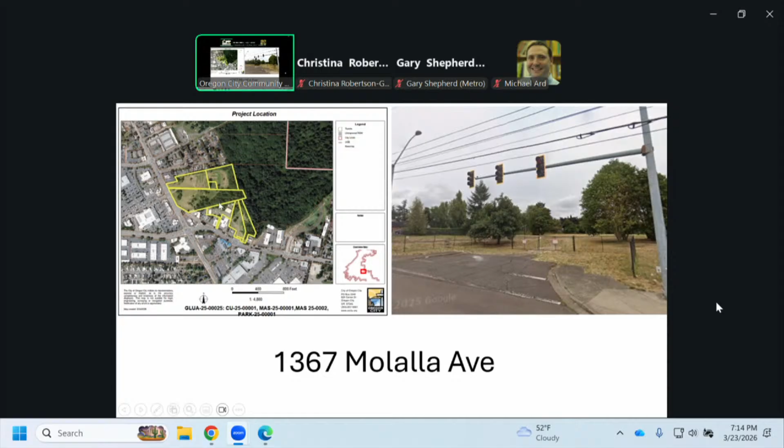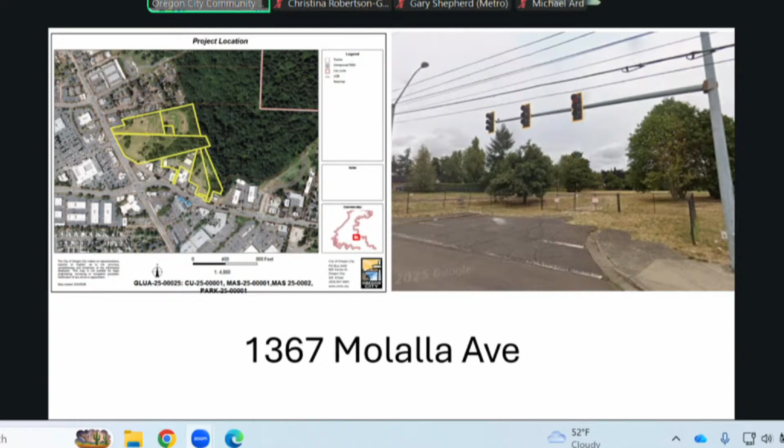So the property is located at 1367 Molalla Avenue. You'll see to the left the parcels involved in this master plan application. The main parcels are up here. The three smaller parcels you see down below are required to connect the public road to Beavercreek Road, and will be removed from the master plan once the detailed development plan is completed.

Here is a zoning map showing the myriad of zoning around this parcel. The parcel is on mixed-use corridor 2, which, a lot like mixed-use corridor 1, allows varied uses of mixed-use and also standalone office, standalone retail, and standalone multifamily. What's different in mixed-use corridor 2 from mixed-use corridor 1 is there's a minimum FAR, or floor area ratio, and the applicant has submitted findings showing they're well above the minimum FAR for this zone.

In red, you'll see general commercial. That's where the Safeway development is. And as you move farther south, kind of where the Fred Meyer development is, that's our general commercial zone. Drive-throughs are permitted uses there - that's kind of your general hilltop commercial, more suburban-oriented development.

Campus industrial, just farther south, is related more towards the Clackamas County campus and our associated campus industrial uses that are more employment-based. To the north, you'll see R3.5 and R10. Those are our residential zones. And at the very top of this map, you'll see the Newell Creek Canyon parking lot.

It's just a little bit outside of this map, but as part of the presentation there'll be some conversation about the shared use path, and the goal is to connect one day to the parking lot of Metro's Newell Creek Canyon access. That's just outside of this map, right north of Beaver Lane and Otter Lane.

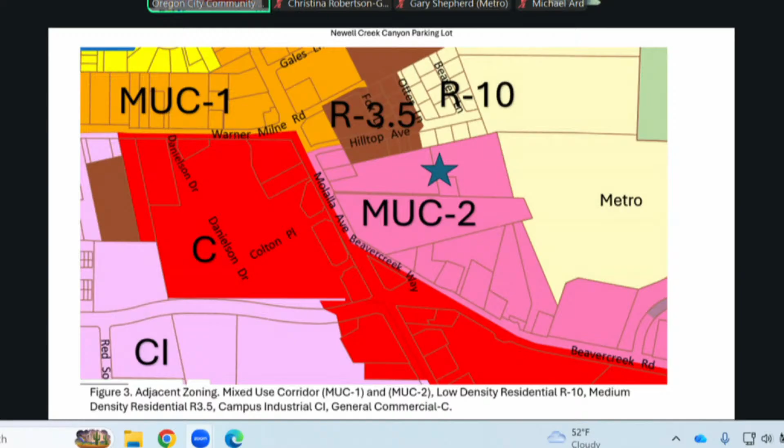So the summary of the master plan elements, the general development plan, are on the slide, and I want to go through them while you look at the map. You don't have to read all of my notes, but you can look at the map while I talk. The applicant didn't have to come in for a master plan - this could have been done through site plan and design review as a multi-parcel redevelopment. But the applicant came in for a number of reasons.

One, they wanted a 20-year master plan to allow clarity and certainty in our development code. When you apply for a master plan, you're allowed to utilize the code that's in place at the time you apply over the many implementation phases of a development. So as Parcels A, B, and D are developed, they all share the same development code as when the applicant submitted.

That allows flexibility in the master plan process. They're able to look at a full transportation analysis for the whole site build-out to see if there are any off-site impacts, rather than coming in individually. We wanted a wholesale approach - this allowed us to look at the reasonable worst-case scenario and what any off-site impacts would occur.

Implementation would happen at the detailed development plan, but this master plan allows us to do that. We can look at the public road and utility locations and site grading as a general approach to see if it meets the intent of our code, and then it can be implemented through each detailed development plan.

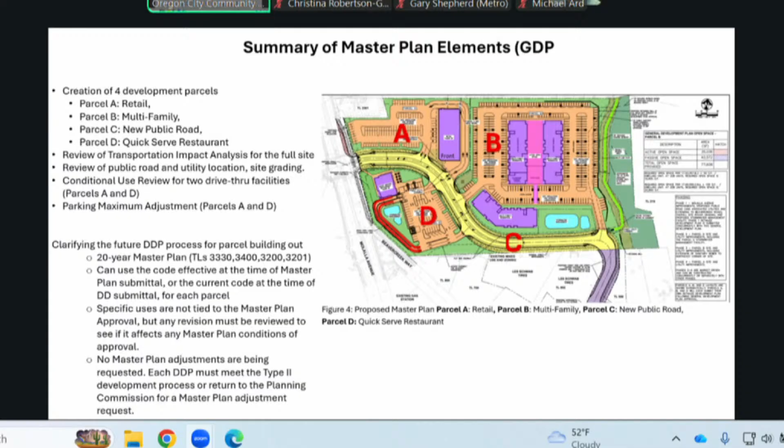Let's go to the next thing. As I mentioned, the two requests in front of the Planning Commission this evening that are type 3 reviews and have a clear nexus are the conditional use for the drive-throughs and the parking maximum. The two questions I'd pose to the Commission are: has the applicant adequately demonstrated a need for an adjustment to the parking maximum standards on parcels A and D, and have any adverse effects been mitigated? And has the applicant designed drive-through facilities on parcel A and D that are safe, contain adequate queue storage, and have any adverse effects mitigated?

I'll go through and lay out both parcel A and D's requests. But when you're thinking about the conditions in the master plan and any questions you may have for the applicant or staff, that's the lens you should be looking at in regards to the parking maximum and conditional use.

So the parking adjustment for Parcel A—what you see here, the applicant initially was working with staff on a specialty grocer on Parcel A. At that time, staff really understood that a specialty grocer probably had a direct reason to need a parking maximum. Because of the odd layout of that Parcel A and where the road comes in, there was a constrained area. What you see to the left is a no-build easement. You can build a parking lot there, but you cannot build any buildings. So having the building right up against Molalla Avenue was tricky.

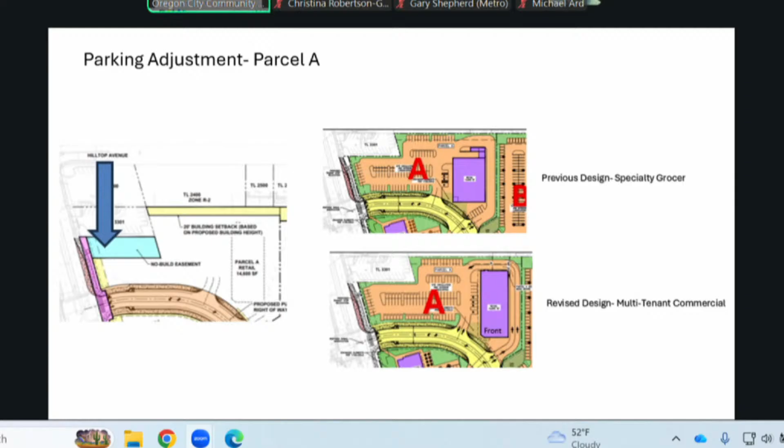About January of this year, the proposed specialty grocer came back to the applicant, and that agreement didn't move forward. So the applicant worked with staff on redesigning that building on Parcel A to be more of a spec multi-tenant building. The building would stay in the same general location, would front the new public road, and what was the back of house—loading and unloading—was repurposed to queue storage for a drive-through. At the north of the property, at the edge of the building, would be where the drive-through would be, with queue storage along the side and the drive-through in the rear.

So with this analysis, the parking maximum request—staff saw it as not necessarily tied to a use. There is no use tied to this building; it could be many different options, it's really spec at this time. But I really understood the constraints of that no-build area. Pushing a spec building against Molalla Avenue, being long and skinny, did not make developable sense and would be awkward for both pedestrians and people parking trying to get access to the building. So in this sense, I really see it as a mitigation for the constrained site.

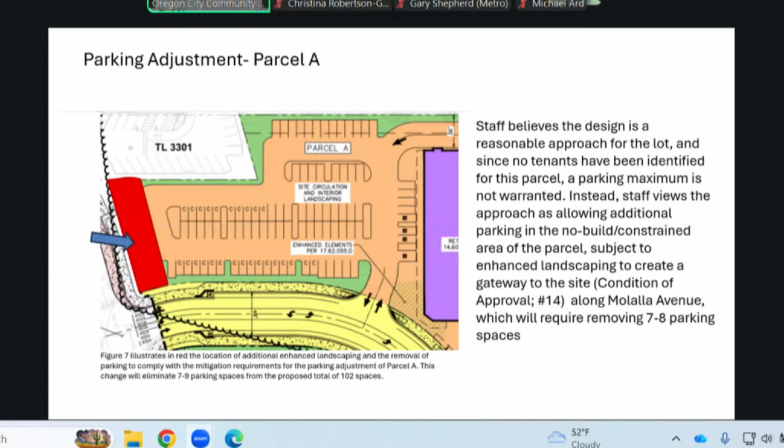Staff used the approach of allowing additional parking in a no-build constrained area of the parcel, subject to enhanced landscaping to create a gateway to the site—that's condition of approval 14 in the staff report. Rather than a use analysis of whether they've made their case, I'm really looking at it as a site planning, space analysis: if a building can't go at Molalla Avenue, what would you rather have—additional parking to support whatever's there, but also make sure there's a gateway of enhanced landscaping. If the Planning Commission denied the applicant's maximum parking adjustment, there would just be a very large landscaping area most likely, and I don't know if that necessarily would serve the people visiting the site or would be beyond what would be required as the gateway. So I'm available for any questions, but that's what staff has seen for Parcel A—more of a site planning analysis rather than a parking analysis.

The parking adjustment on Parcel D is a quick service restaurant.

As part of the analysis, both through the drive-through and the parking adjustment, really seen as a gateway look on Molalla Avenue. So the applicant initially showed some enhanced landscaping areas, right along the intersection, along the new public road of Molalla Avenue. But really, I think as part of the conditional use, making sure that that car and queue storage is blocked from the pedestrian experience on Molalla Avenue.

Staff has added some additional areas in red that will be added to that enhanced landscaping area. And those conditions look at square footage of enhanced area, and there's a certain amount of additional trees and shrubs that will be required, both in Parcel A and Parcel D.

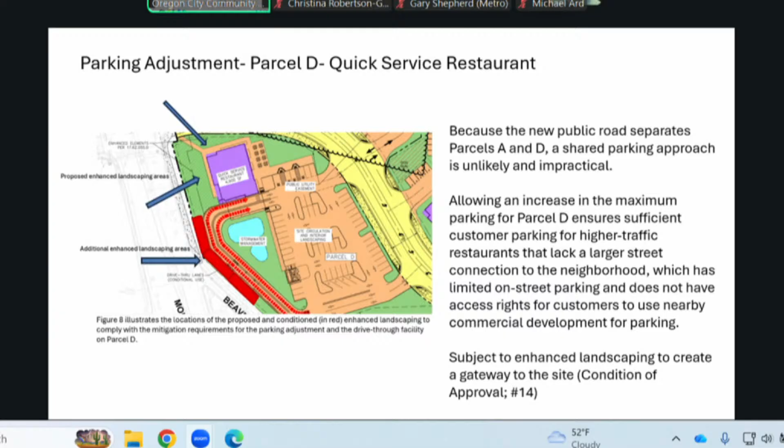So the conditional use drive-through facility for Parcel A, as I mentioned, is nicely repurposed to have a double queue storage. These are both permitted uses, whatever the drive-through will be, for a restaurant or other type of use that requires a drive-through permitted in the zone. The drive-throughs are located to the side and rear, and the buildings are not exclusively dedicated to drive-through. Drive-throughs are an ancillary use.

This is not a small little drive-through coffee facility. This is a larger building that has drive-throughs as ancillary.

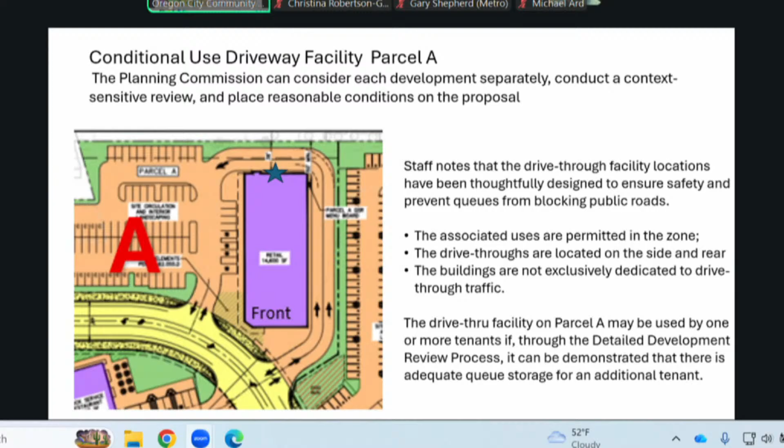The Planning Commission can consider each development separately, conduct a context-sensitive review, and place reasonable conditions on their proposal. If the Planning Commission was reviewing a drive-through down on our main street or in our downtown area, that's a much different context, with a different analysis of impact and mitigation. So when thinking about the conditional use review for these two facilities, the key thing is understanding the context of where you are in the Hilltop area, what its impact would be for both pedestrians and vehicles inside this Hilltop area, and you can put reasonable conditions on this application.

So the conditional use driveway facility for Parcel D, as I mentioned, is well-designed. It has a large queue storage, and staff has identified additional enhanced landscaping.

The one thing I do want to add is that we put a condition on, anytime you have a popular quick serve restaurant, the first couple months of opening days sometimes can be more popular than what a standard transportation analysis impact would predict. So as part of the DDP application, staff is requesting the applicant implement an on-site and off-site opening day pedestrian and vehicular circulation and safety plan to address some of that additional traffic congestion that might happen during the opening days of any restaurant.

That would be scoped out with our transportation engineer about how to do flaggers, what's the opening day approach if there's any kind of additional transportation impacts while the restaurant is popular, before it goes back into background conditions.

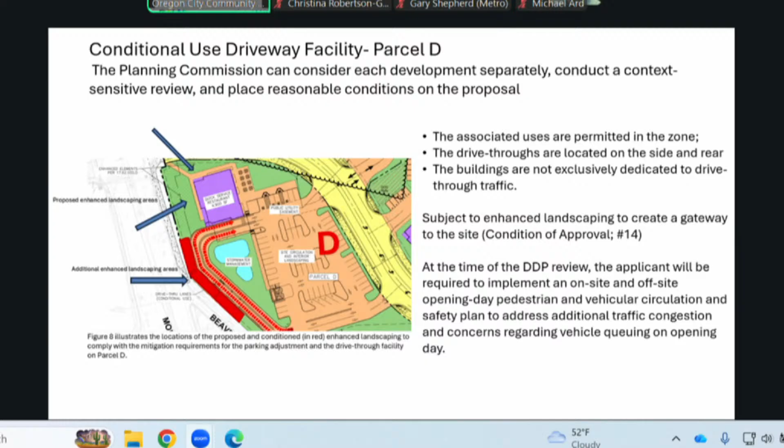As part of the master plan, we look at a utility analysis. We did a transportation analysis with the applicant to see what offsite impacts may occur, and both the application submittal and our review by our transportation engineer identified that there were no additional offsite impacts beyond the two signals at Beaver Creek and Molalla Avenue that they would add to their leg of the intersection. Each detailed development plan will be paying for the systems development fee at the time of DDP application, as well as that proportional share for their contribution to the project at 213 and Beaver Creek.

The shared use path, as you see on your right, is a bicycle and ped path that's been identified in our transportation system plan. At a transportation system plan level, we're really just connecting points A and B. So oftentimes you'll have a line on the map, but when you get to the detailed development plan or a normal site plan design review, you look at the actual path of where you get from A to B.

So the goal is to have a connection for pedestrians and bikes from Beaver Creek along the site, through the site, and connecting up to that parking lot at Newell Creek Canyon. How do we get there over time and ensure our development applications can provide for that long-term build-out? The exact location can be amended on the site where it makes the most sense for the development, safety, grade, and all those kinds of things.

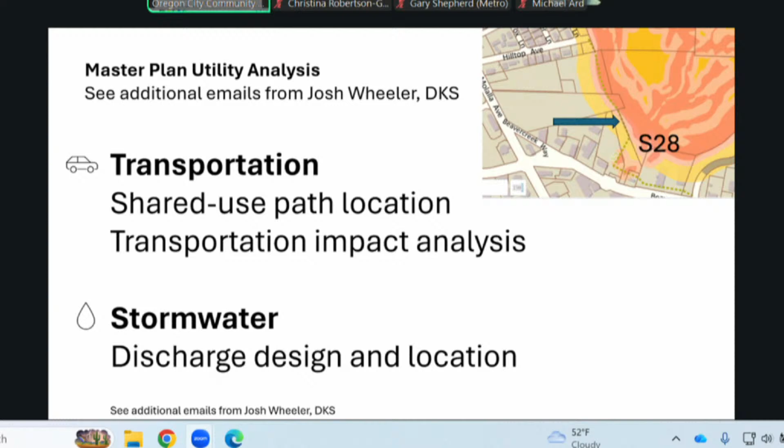As I mentioned, the detailed development plan was for Parcel C, the public road. That public road runs along the master plan site and also down along those additional parcels I spoke to you about. These parcels are required to be in this application because of an agreement with those property owners that this road gets built, but they are not part of the master plan moving forward. So it's brought in to be reviewed, and once the street is completed, those tax lots will be taken out of the master plan.

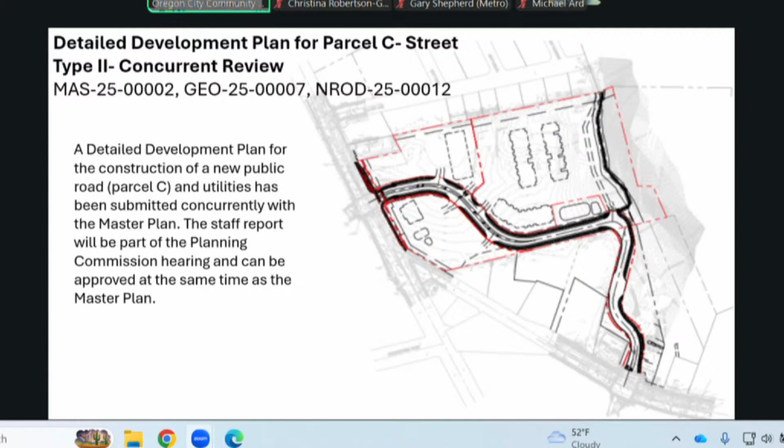There are two items I want to review as part of the detailed development plan for the streets. There's a small section in our natural resource overlay district. There is a stream that's culverted, and the culvert opens right toward where the road connects to Beaver Creek, the new public road. You can see it down here on the figure. As the road comes in, it will not cover any of the existing open resource, but where it's culverted in the 50-foot buffer, the road will nick a little bit of that buffer, and the applicant is required to mitigate for that per our natural resource overlay district.

They have identified a mitigation area, which is actually in the same location as the shared use path. Our natural resource overlay district code allows you to mitigate at the exact location if available, but in this case it's not possible because the land goes down a hill and there's no location to mitigate right at the resource. You can mitigate farther on site or within the same basin, so there are a couple of opportunities, and that's written in the condition. They could work with Metro or other parts of the Newell Creek Canyon area on their mitigation. Our mitigation standard in the natural resource overlay district is clear and objective: you have X feet of impact, Y square feet of mitigation, even the trees and bushes are a math calculation. In the conditions of approval for the street, you'll see they've done that math calculation per our development code, provided the findings, and included a landscaping plan that meets our code in their submittal application packet.

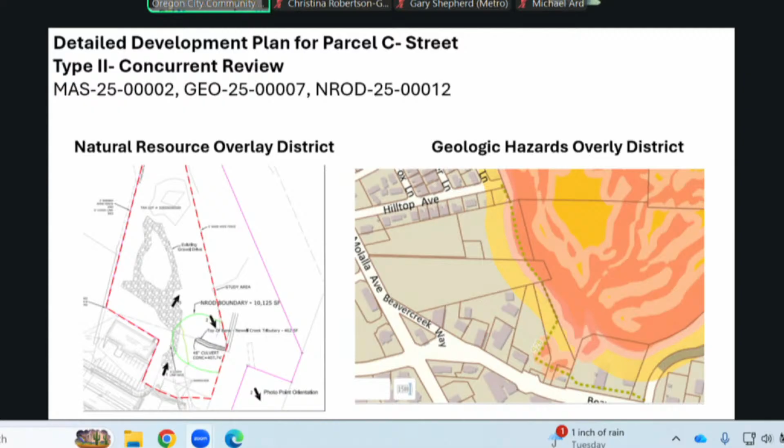So there's not really access to the Newell Creek Canyon area of Metro in this location. To access this, you would have to make your way up to the parking lot to get access to the Metro site. There's really not topographic-wise a way for kind of a side trail to get down to the Newell Creek space.

So staff has identified some revised conditions of approval. One relates to the master plan that really looks at the shared use path's safety in its location. While it can be technically built through a geologic hazards code, we as staff are recommending a revised condition of approval that requires the applicant to relocate that shared use path higher up and integrate it with the Parcel B redevelopment with the apartments, so it's integrated with the development. Eyes are kind of on who uses the path, and it can be seen.

So I have those conditions. I won't read them, but I have those conditions on this screen.

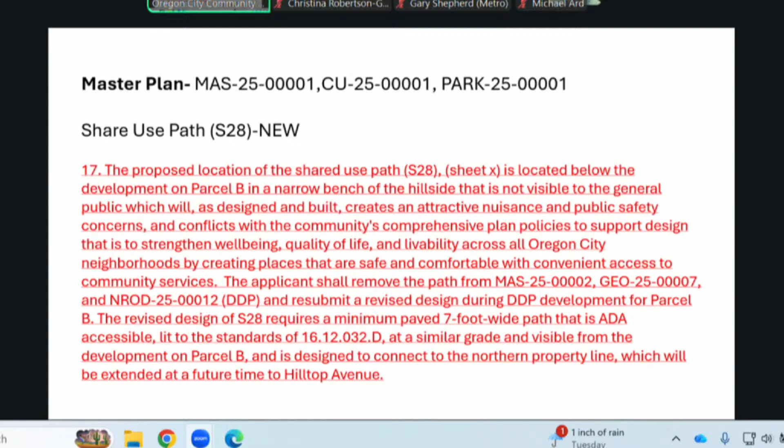With that, the detailed development plan would be revised to remove the conditions related to the path on the detailed development plan's approval, with one condition remaining that says the applicant shall construct their portion of the TSP project within Parcel C as a public 7 to 10 foot path. So the road portion, as you come up from Beaver Creek Road, will have a sidewalk that is the shared use path. It's only when it leaves the right-of-way that they'll have to come back with on Parcel B, the apartment section.

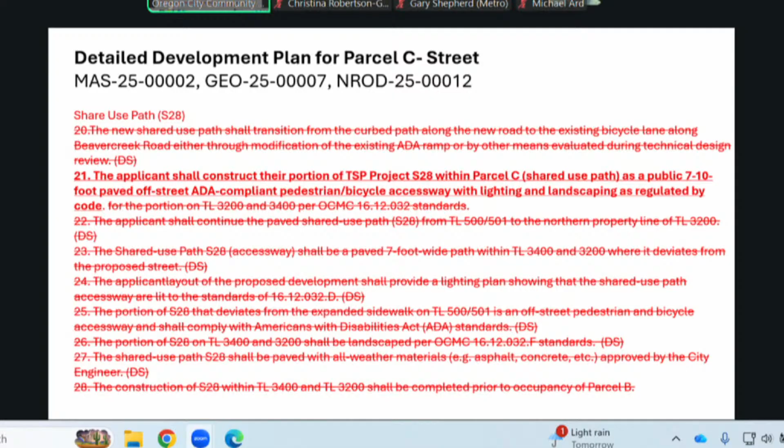One final revision I just want to highlight. I was speaking to the applicant about Parcel D, the quick serve restaurant. And they brought it up and I didn't realize it, I'm glad they did. There are some power lines right at Molalla Avenue, and the condition as written, some of those trees may conflict with power line requirements.

So we added an extra sentence that said it's not changing the number of trees, but if those trees are planted near power line easements, then the final height can go down to the height that you could put under, like a street tree height under a power line. So we had, I think it was either 35 or 45 feet final height. In those areas, it would probably be like 25 feet, which is allowed under power line easement. So it's just an extra technical sentence acknowledging that in that gateway area, there may not be ways to put some full trees where there are power lines.

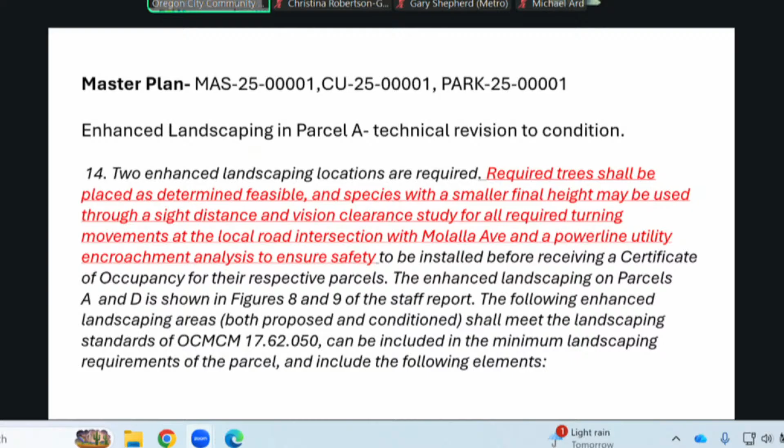Staff recommends approval of both applications with the revised conditions outlined in the presentation. You have many options this evening. I think the applicant will be requesting continuance, so we don't have to go through these tonight. But I'm available for staff questions, and Josh Wheeler is available for any engineering questions you may have related to stormwater, the shared use path, and transportation.

Are there any questions that the commissioners have of staff regarding her presentation? Commissioner LaSalle?

I was reading the staff report for the master plan, and on page 25 it says the application was deemed complete on December 18th, 2025. That's correct, and the 120-day decision date for this application is April 17th, 2026, with an extension to May 17th.

Why are we just seeing this now? It seems to be putting everything on a pretty short timeline. The applicant turned in the application in June and it was incomplete, and they worked through the summer and fall to complete it. Right around January, as I mentioned, their tenant in Parcel A fell through, so they extended 30 more days with staff, went back and reworked Parcel A's design, and now we are here with the hearing.

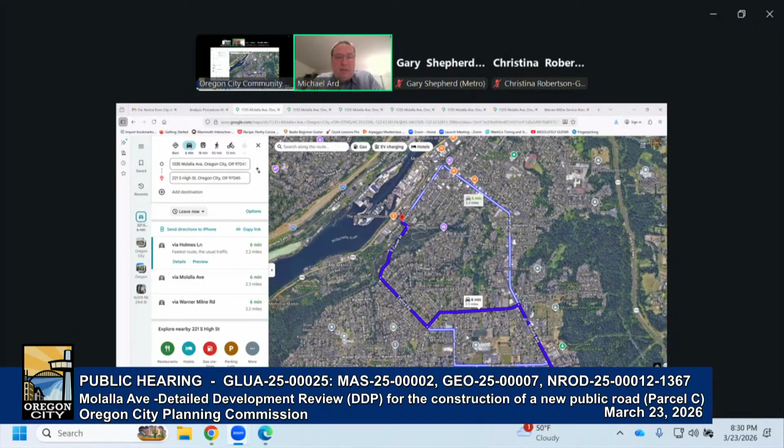I wanted to share a few things regarding my review of the traffic impact study, and the reason that I had some concerns. Real quickly, can you state your name for the record? Oh yes, sorry, Mike Ard. I am a professional transportation engineer with Ard Engineering, and I reviewed the application.

I was interested in seeing what the application had to say about the intersection of Warner Milne Road at Linn Avenue in particular, because I know it's in close proximity and that's an intersection that's been subject to some significant discussion historically within the city. And I was surprised to see only 15 PM peak hour trips, or about just a little under 8% of the site trips, shown headed that direction.

The traffic impact study indicated that 5% of the residential trips would be shared between Warner Milne Road and the street—the name's not showing up, but it's this blue one that's highlighted here. Holmes, I think it is, something like that. And then 10% each of the commercial trips on each of those roads.

And what I wanted to show is why I find that likely to be incorrect. So if trips are headed to locations that are on Telford Road or going down the hill via Center Street, it's about the same travel time and distance to take Warner Milne Road versus the alternative to the north. And so that's kind of a dividing line where things to the north side of Telford Road generally would not attract significant trips from Warner Milne, and things to the south would.

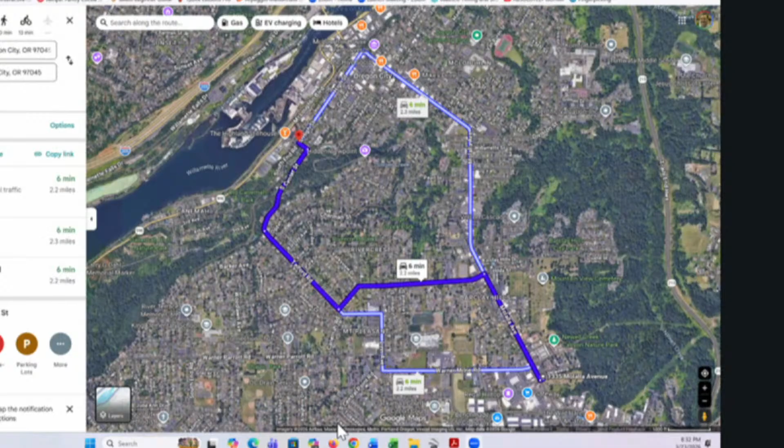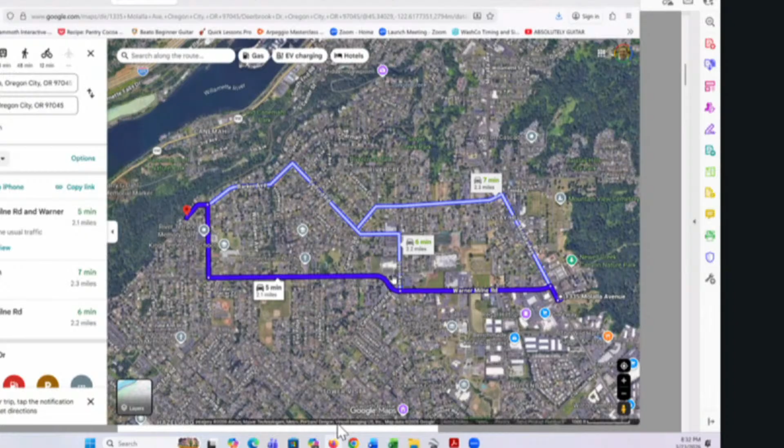Boy, I kind of blocked off my tabs here, so I need to just resize this real quick so that you can see. Looking at other destinations though, you can see anything that's on Warner Parrott Road, anything that's on South End Road before you go down the hill, is most conveniently accessed via Warner Milne Road. Anything that's on South End Road to the south is also best routed via Warner Milne and through that intersection. If you're going out Central Point Road, same thing.

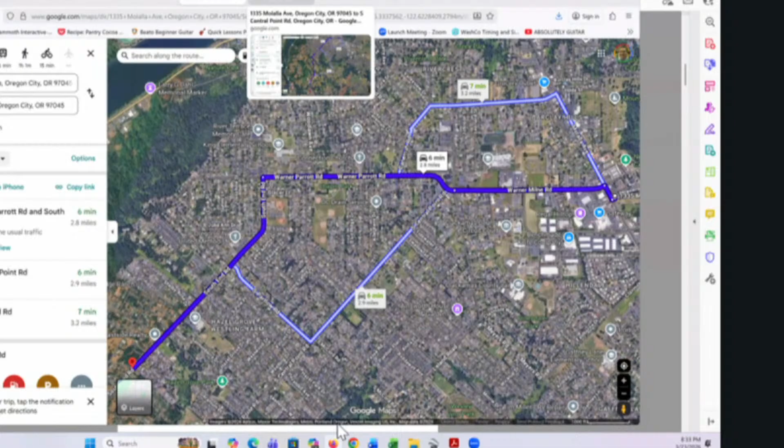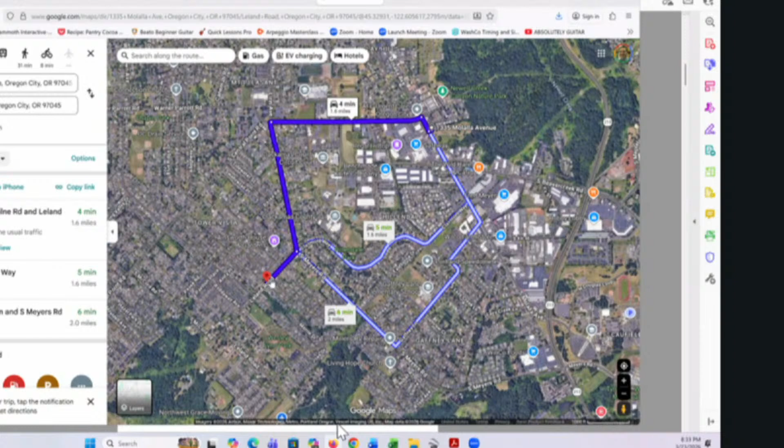You go down Warner Milne to Central Point Road. If you're going to Leland Road, the fastest route to get there is again Warner Milne Road. So there's a significant amount of traffic in the city that's going there. If you're headed to Canby, like 5% of the residential trips appear to be showing going to Canby, again the fastest route is via South End Road, which again would take Warner Milne Road.

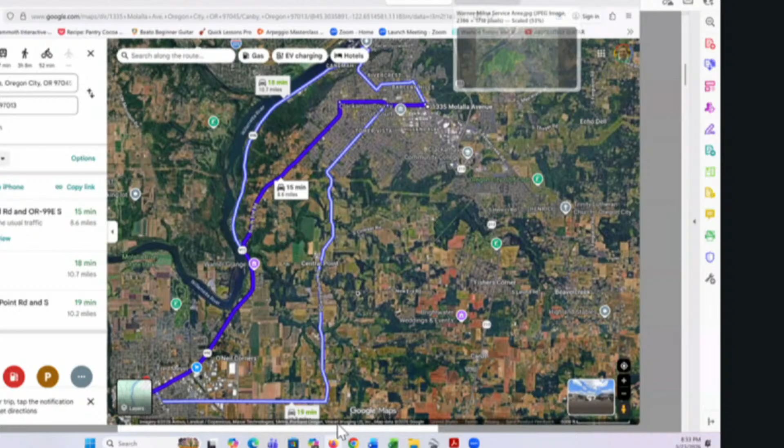Based on all that information, I drew a little area and put this into my comments via email that shows the basin within the city of Oregon City that is served by Warner Milne Road with respect to this project site. So this was all for trips that have an origin at the site, and it's a very significant portion of the city. Even if we assume that all of the distribution assumptions the applicant made in their traffic study were correct...

but then corrected the routing to reflect the fastest and shortest travel paths, it would be a very significant change to the trip distribution model, and there would certainly be more than 20 trips that pass through that intersection of Linn, Leland, and Warner Milne Road. So I do feel like the obligation based on the city standards would be to analyze that intersection and provide some information about it.

I did have some comments as well about trip generation, the fact that a fast food restaurant with side-by-side drive-through lanes is covered in the new 12th edition Trip Generation Manual and has trip rates that are about 85% higher than for a standard fast food restaurant. I think that's largely going to be offset, if I heard correctly tonight, by the fact that there is not a grocery on the site. The overall trip generation I expect to be relatively similar, because there's a reduction on one side of the road and an increase on the other.

That does mean your queues will change based on the higher volume going to the south side of the road to that new restaurant. So it might be something the applicant wants to look at.

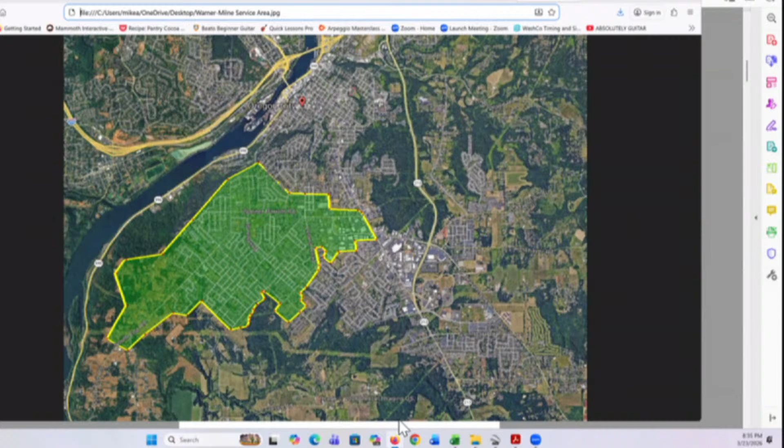Okay, so now we are at the point where we want to entertain motions on both of these items, right?

Yes, but we may be in a compressed time frame. I think Commissioner LaSalle raised that. If the commissioners have any questions or initial feedback, I think it would be really helpful for everyone in this room to hear that feedback. I know Chair Espy, you made a couple of comments about signage, light trespass, and pedestrian paths on Molalla, but that's pretty much all I have. That's the kind of feedback I think would be helpful to get, because on the 13th, we're going to be in decision-making mode.

Correct, and we're going to have to move this along. I'm not asking you all to make a decision or tell me whether you'd vote for it, yes or no. What I'm asking is if you have additional feedback, want to see additional information, have additional questions for the applicant to respond to, if you think the path needs to be more integrated as staff has recommended, or if you have a better idea you'd like the applicant to explore, now would be the time, because I don't know that we're going to have time on April 13th, the continued hearing. If you don't want to, that's okay too, but I just wanted to throw that out.

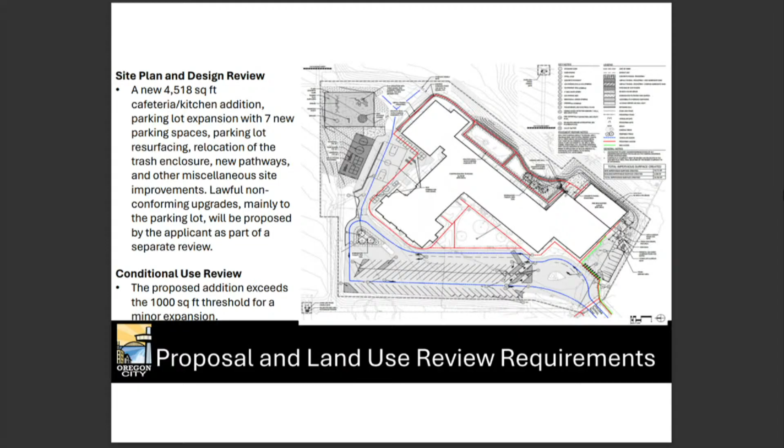So the reviews that are required are a site plan and design review, along with the conditional use review. Basically, for the site plan and design review, they're proposing a new 4,518 square foot cafeteria addition, a parking lot expansion with 7 new parking spaces, parking lot resurfacing, relocation of a trash enclosure, new pathways, and other miscellaneous site improvements. Lawful nonconforming upgrades, mainly to the parking lot, will be proposed by the applicant as part of a separate review.

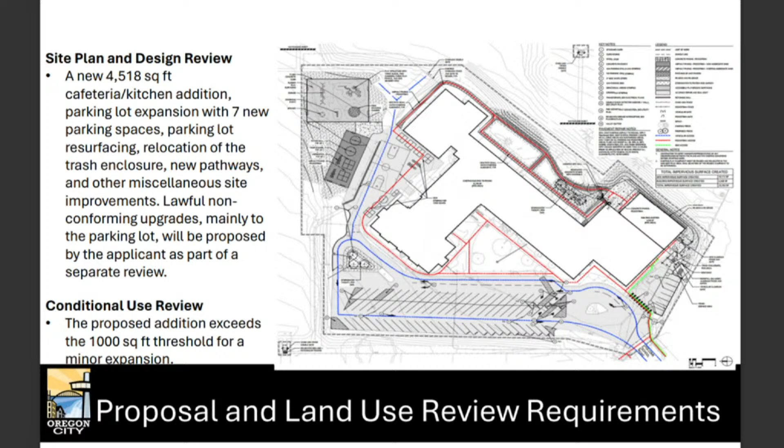The conditional use review is needed because the proposed addition exceeds the 1,000 square foot threshold for the minor expansion. And that's why we're here today, to review for conditional use.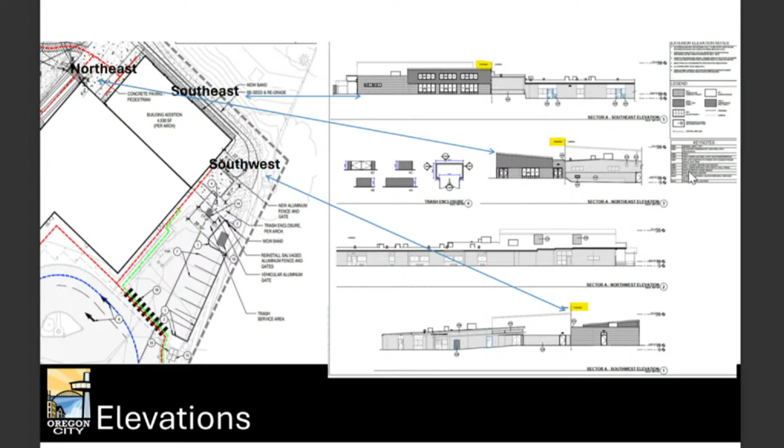Here on this slide, you're going to see the elevations, and there's some arrows just kind of pointing to which elevation is going to be at which location on the building. So you'll see where the northeast links up with the southeast and the southwest portion.

This slide just lists the conditional use approval criteria. I'm not going to read this whole slide, but basically it's asking if the conditional use is allowed in the underlying district, talking about the characteristics of the site, compliance with 16.12, that it's not going to alter the character of the surrounding area, and then it satisfies the goals and policies of the city comprehensive plan. And then there's a specific call out for schools as a conditional use.

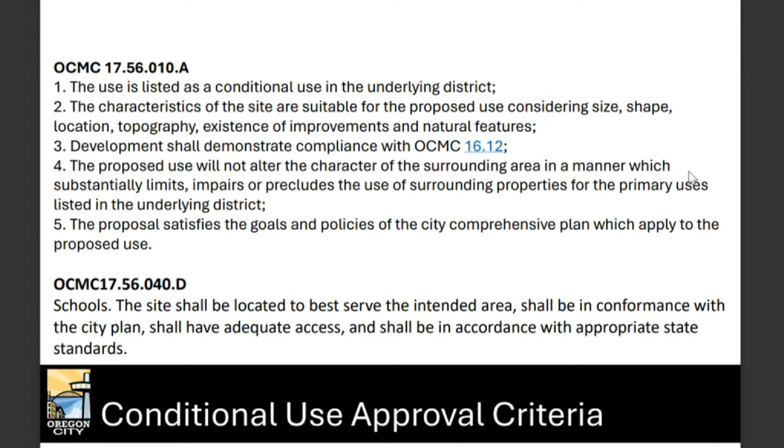The next slide is a summary of the staff's findings. Basically, Holcomb Elementary School is within the R10 zoning district where public educational facilities are an allowable conditional use. The site spans across 13.04 acres where the shape, location, and topography are suitable for the proposed expansion while maintaining adequate access. The surrounding area is predominantly residential, which promotes walkability for school-aged children and accessibility with different modes of transportation. And schools provide a necessary service to the public while also providing jobs, which meets OC 2040's Diverse Economy Goal 1.

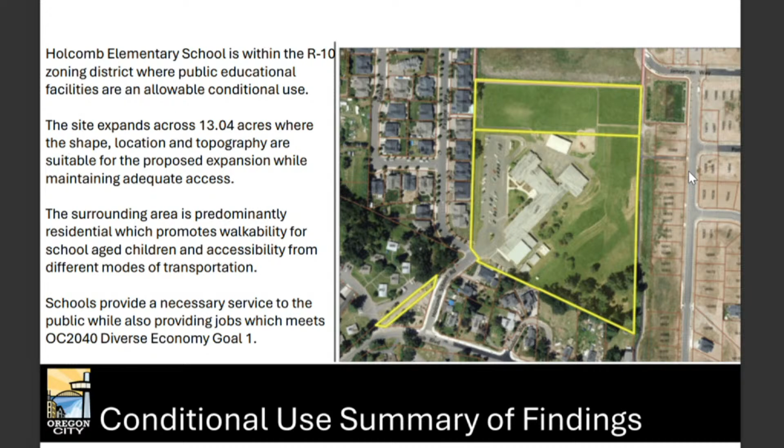There were no conditions based on the conditional use review. However, when the agenda went out, there was some discussion with the applicant for some clarity of these conditions that are related to the site plan and design review. So you can see condition 12, condition 15, and condition 21 have all been revised for clarity.

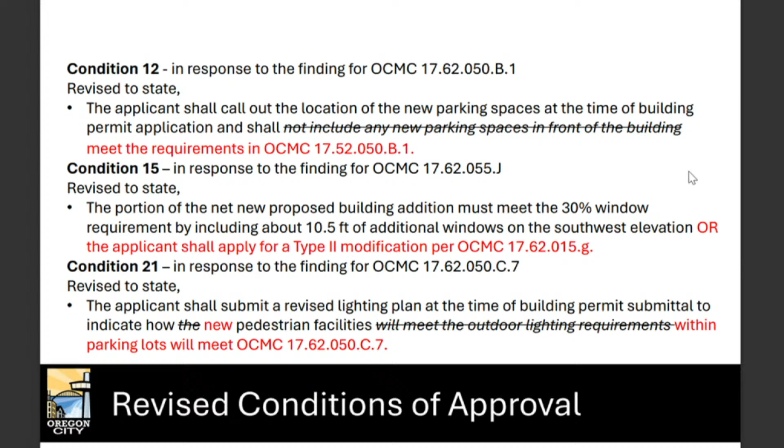We're going into the options where you can either approve the proposal with the conditions, which is what staff is recommending, approve the proposal with modified conditions and provide any revised findings, or do not approve the proposal and provide direction to staff. If you have any questions for me at this time, that would be it.

Thank you very much. Are there questions of staff?

I just have one. Was there a previous conditional use permit on this site? It was approved via Clackamas County. And since it's been annexed, it has not gone through a conditional use review. It had a review back in 2020 for a minor site plan and design review, which didn't call into question, there was no expansion over 1,000 square feet, so it didn't need to have the additional conditional use review at that time.

Okay. Can I entertain a motion? We need your... Oh yes, let's hear for the... I'm sorry. We can make this quick.

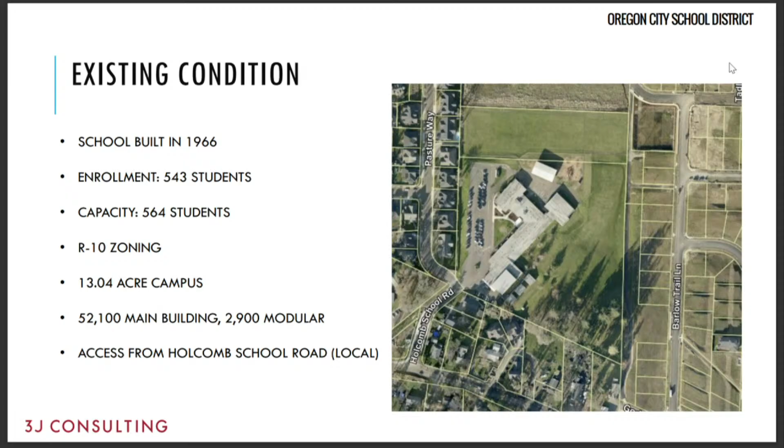Next slide, please. As mentioned, the school was built in 1966 in Clackamas County. It has a current enrollment of 543 students with a maximum capacity of 564 students. It is in the R10 zone on a 13.04 acre campus. The main school building is just over 52,000 square feet, and it is accessed from Holcomb School Road, which is local.

Next slide. As part of the proposed improvements, there is the cafeteria there in the southwest corner, as well as a trash enclosure, which will be adjacent to that cafeteria to provide easy access for the kitchen. New storm improvements along the east side of the school, where new pathways will connect from the cafeteria over to the play area. New soft play area and new hardscape play areas, well, new painting on the hardscape play and new soft play areas are proposed. And then just a point of clarification, the parking lot is being resurfaced only in the area near the cafeteria. The other area is being resealed and restriped.

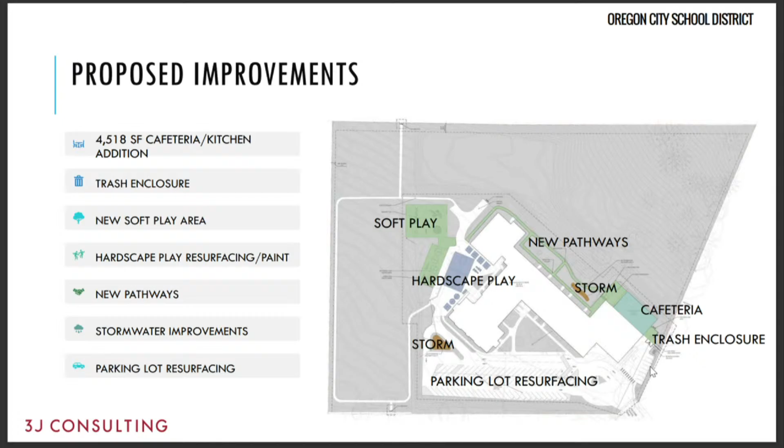Next slide. Can I ask a quick question? What's a soft play area versus a hard play area? I believe it is not an impervious surface, it's like a chip area with play equipment. Got it, thank you.

The new cafeteria will accommodate more students per lunch period. The current cafeteria is fairly constrained. The new trash enclosure is adjacent to the kitchen area, and there's a new outdoor eating area just adjacent to the cafeteria to the north.

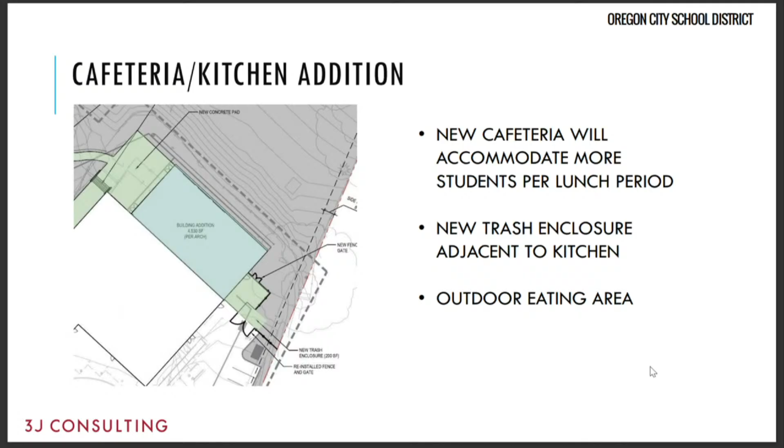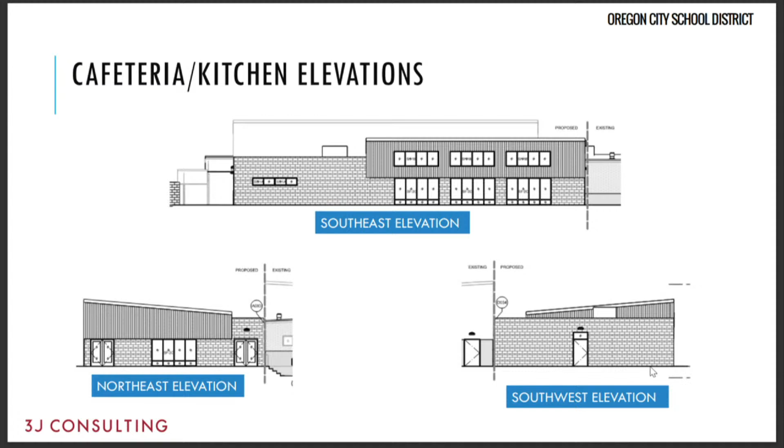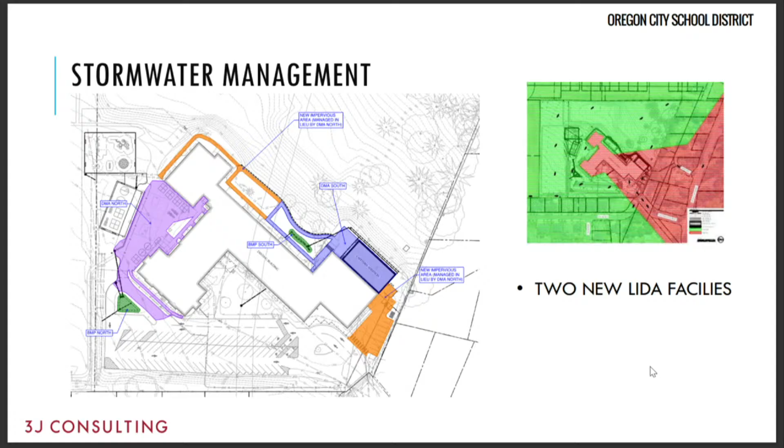There will be two new storm swales, low impact swales on the site, one near the new pathway and one in the parking lot, to help treat the new impervious area created by the proposed project. Next slide.

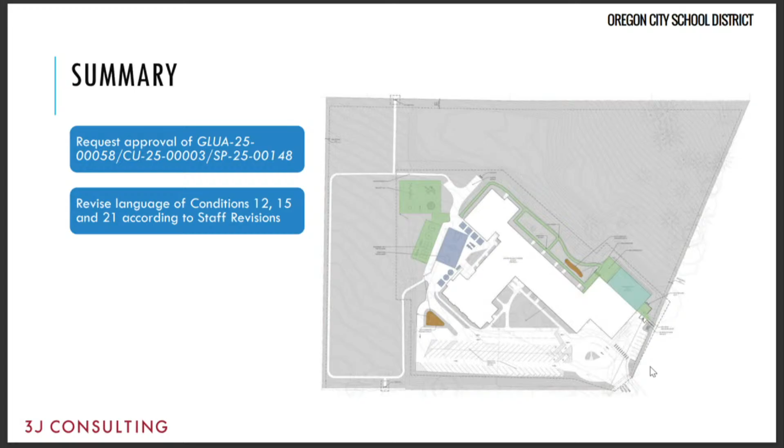In summary, we request approval of the land use application for the proposed expansion. We agree with staff's findings and the suggested condition changes to 12, 15, and 21 as presented in staff's report. Thank you, I'm happy to answer any questions.

Thank you very much. Are there any questions from the commissioners? Hearing none, I think we can entertain a motion now, right? You could close the public record. Okay, we'll close the public record. Do we need to ask for public comment? I haven't gotten any speaker slips. Is there anybody online? I don't think so. Everybody likes schools.

I'll make a motion to approve GLUA 25-00058, CU 25-00003, SP 25-00148, conditional use for the Holcomb School addition of a cafeteria. I second. Call the roll. Aye. Commissioner LaSalle, aye. Commissioner Guymont, aye. Chair Espy, aye.